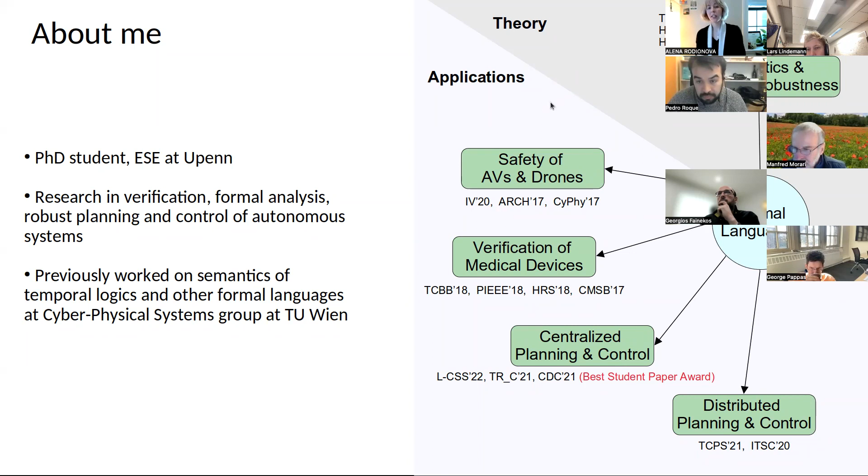That's why my PhD can be roughly split into two parts: one about mostly theoretical research on formal languages and temporal logics, and the second part about how to apply those findings from the theory to applications. That's why I split today's talk also into those two parts.

In the first part, we will cover some basic knowledge of temporal logics and robustness in general for them. I will present what has already been done and what my main contribution is. In the second part, we will touch upon those applications of different robustness measures for temporal logic, for planning and control of different cyber-physical systems.

Just so everyone understands, when I say applications, we use this term cyber-physical systems because those are systems in which a mechanism or an object is controlled by a computer-based algorithm. These cyber-physical systems cover a lot of applications such as safe autonomy, medical devices, drones, manufacturing, and many more. In today's talk I will be talking mostly about drones, but you should understand that these findings can be applied to any of those cyber-physical systems.

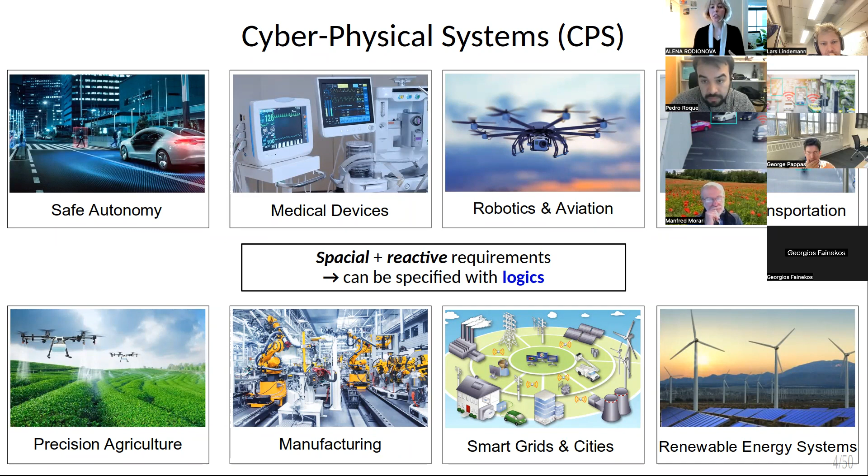If we want to do something good with those systems, for example control them, first we need to find a language in which we're able to specify what those systems are intended to do. Even though natural language is great, it's not precise or concise enough to express the missions of those systems. Moreover, those systems have spatial and reactive requirements. So the standard approach to express their missions is to use a formal language, or logic as one of those formal languages.

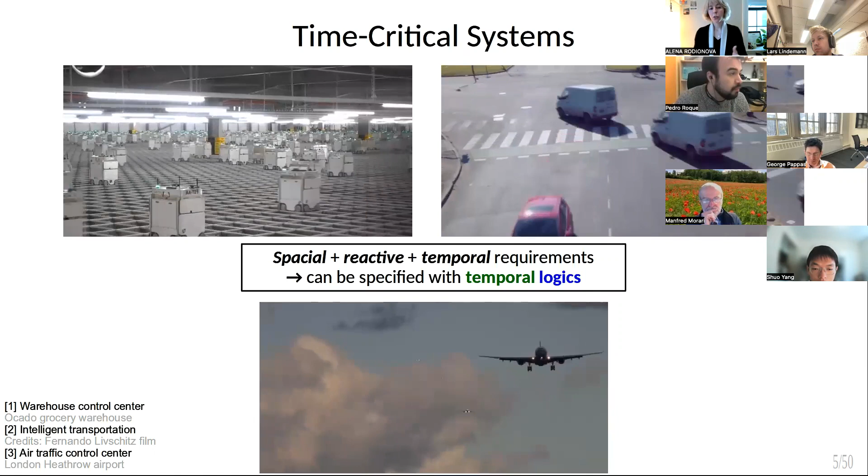One specific type of cyber-physical systems I wanted to mention is called time-critical. Those are systems in which the temporal aspect of the mission is the most important part. So on top of the spatial and reactive objectives, these systems also have a temporal aspect, and not meeting some real-time constraints might lead to catastrophic consequences. So instead of using just any logic, the standard approach for time-critical systems is to use temporal logic instead as the language to express those missions.

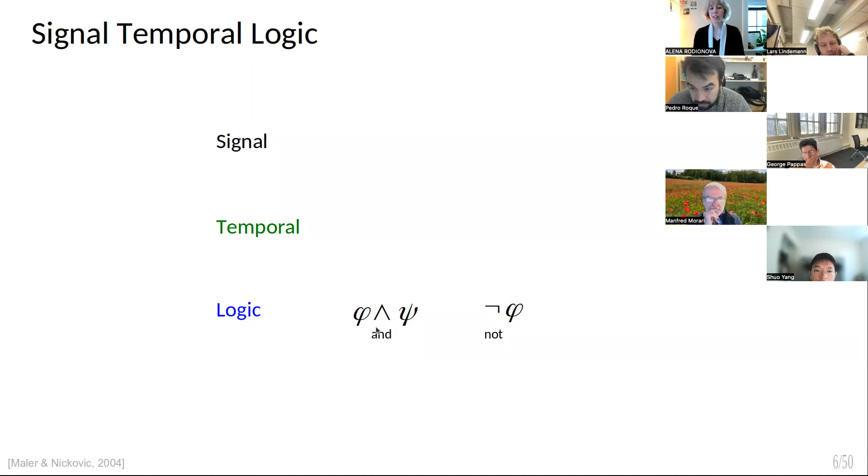One of those temporal logics is called signal temporal logic. It was invented in 2004 by Oded Maler and Dejan Nickovic, who was my co-advisor back in Austria. You could think of signal temporal logic as a simple extension of propositional or Boolean logic. We have operators like and, not, and or, the standard Boolean operators. On top of this, we have the ability to express temporal behaviors of the system, with additional temporal operators such as until, always, or eventually. Now we're able to express properties that say, for example, something must eventually happen in the future, or event A must be happening until event B happens, etc.

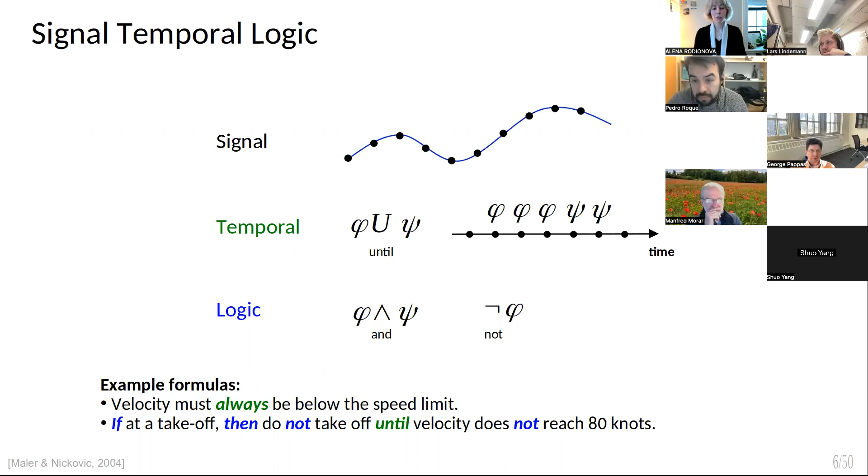The signal part here says that the satisfaction of the specification is evaluated over real-valued time series, which could be, for instance, the trajectory of a drone, the trajectory of a vehicle, or even multiple agents that participate in this mission.

So now, knowing the alphabet of this language, we also need to understand the meaning behind the formulas, and the meaning is called semantics. The first simplest semantics we could define is called Boolean semantics, which defines nothing but the satisfaction or violation of the specification. So Boolean semantics says if the formula is satisfied or if the formula is violated.

For instance, if we have the formula that says velocity must always be below the speed limit, you can see that for this specific trajectory, the specification is violated, and for both of those other trajectories, the specification is satisfied. The issue with Boolean semantics when we work with real valued signals is that we lose a lot of information about the signal that we could keep in mind. So for instance, those two trajectories satisfy the spec, and we don't know anything else.

On the other hand, we could obtain more information because we have those real values from the signal. That's what quantitative semantics does. The qualitative or Boolean semantics only defines a yes or no answer. Quantitative semantics gives you a real number about how well the spec is satisfied or violated.

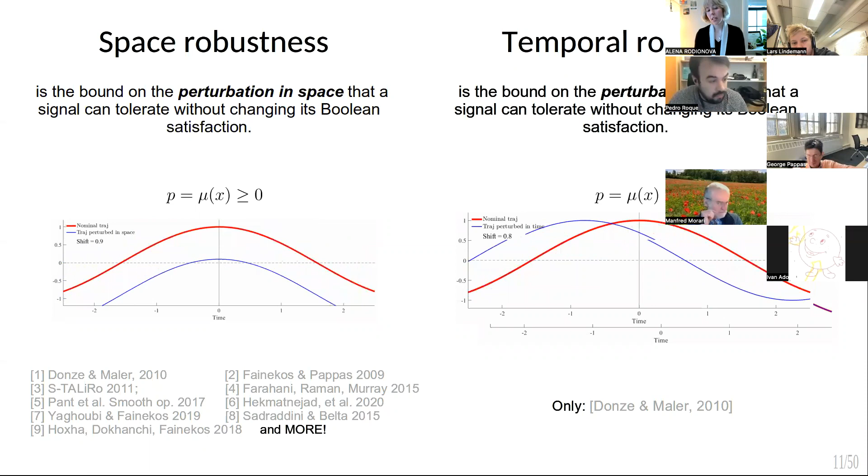Moreover, it has never been applied for planning and control in the past, and that's what our main contribution here is. My main contribution is that we provide this theory behind temporal robustness - the different definitions and the overall theoretical analysis of the meaning of different notions. In this first part of my talk, I'll try to briefly explain the meaning of different notions of temporal robustness, and we'll see how this can be applied for planning and control.

Let's take a look at the following example. We have some specific signal, and in order to evaluate satisfaction or violation of the spec for each time point, as we already saw, you first need to evaluate the predicates, each predicate within the formula for each time step, and then apply recursive rules depending on how many operators you have.

So you could think about them as predicate signals. And when we talk about temporal perturbations, you could think of them as shifting the signal to start execution of the trajectory earlier or start later - shifting trajectories to the left or to the right.

For simplicity of the presentation, since satisfaction depends on the predicates, let's think about it as shifting the predicates themselves in time. If the trajectory starts execution earlier, we shift predicates to the left. And if the execution starts later, we shift them to the right. Now the question is, how do those shifts influence the satisfaction of the spec?

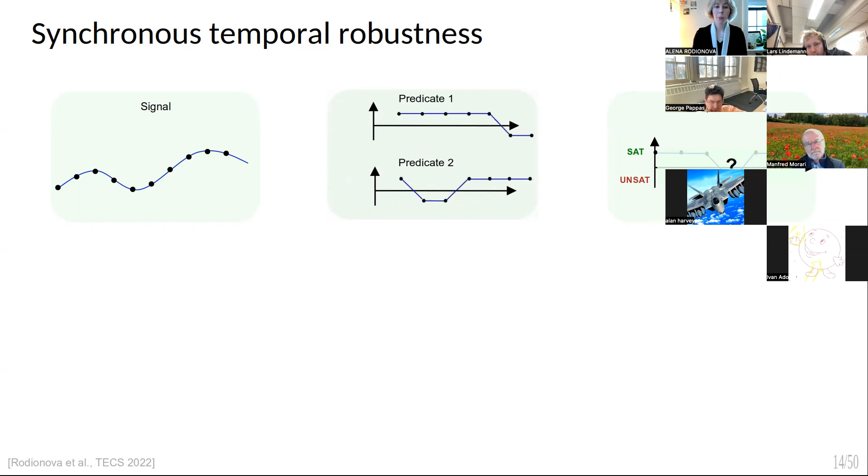The easiest way we could shift those predicates is together, synchronously in time, since that's the simplest case. Let's analyze that first. That's exactly what synchronous temporal robustness analyzes. It gives us this bound on the possible amount of synchronous perturbation in time that the system can tolerate.

Because those shifts can be to the left or to the right, we can also analyze left synchronous robustness or right synchronous robustness. Here I will briefly explain the left; the results can be extended also to the right.

The main result to understand the meaning behind synchronous robustness is as follows: if the left synchronous temporal robustness value is some epsilon, then we can shift predicates together, synchronously, in time to the left by up to epsilon. So all perturbation in a synchronous manner by up to epsilon will not change the satisfaction of the spec. Moreover, we can infer that anything greater than epsilon, which in discrete time would be epsilon plus 1, would lead to violation of the spec, to a change of satisfaction.

We specified it in English, and we can also specify it in formal formulas like here to avoid any ambiguity. This stands for: left temporal robustness for a specific trajectory and specific time point equals epsilon. Then we can infer that for all shifts h, the Boolean satisfaction of the shifted signal to the left is the same as satisfaction for the default signal. And for any shifts by epsilon plus 1, the satisfaction would change.

Okay, so that was the meaning of synchronous robustness. When we talk especially about multi-agent systems, if, for instance, all predicates are defined over individual agents, you could think about it as individual agents starting all earlier or starting all later. In those complicated multi-agent systems, sometimes it would be very beneficial to have the ability of saying how the system responds to perturbations when some agents start earlier or some agents start later.

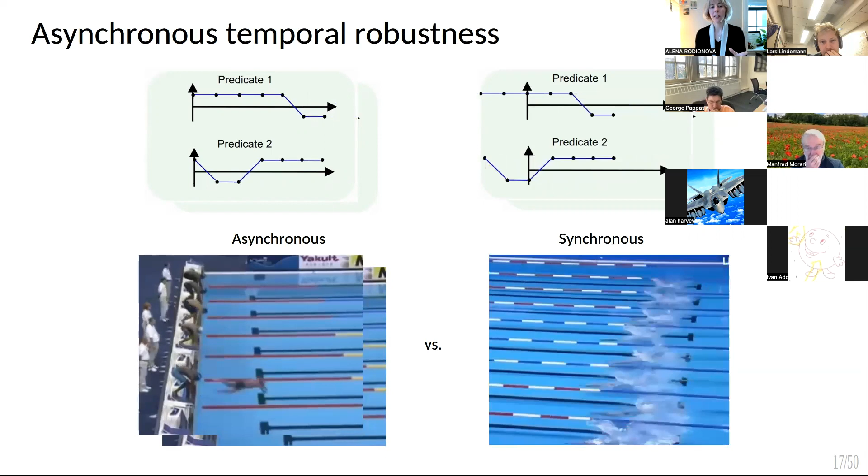That's the difference between synchronous robustness and asynchronous robustness. Asynchronous robustness is able to determine the behavior of the system when predicates are shifted by an individual amount in time. Let's take a look at how the property changes depending on synchronous or asynchronous behavior. I won't give you the precise definitions here since asynchronous temporal robustness is a bit more nuanced, and the property becomes weaker.

The only thing we can infer about asynchronous temporal robustness is that if its value is some specific epsilon, then we can shift predicates individually in time by up to epsilon. You should note two specific details here. First, we cannot say what would happen if the amount of perturbation exceeds epsilon, so we cannot infer the second line of the theorem that holds for synchronous robustness.

We also cannot infer the opposite direction of the statement. So for instance, if we have experimental data on the performance of the system, we cannot obtain the value of the robustness itself. Here you can see the statement again in formulas. The main difference, to recap, is that for asynchronous robustness we have individual shifts for every predicate within the formula—that's why we have H1, H2, etc., up to HL.

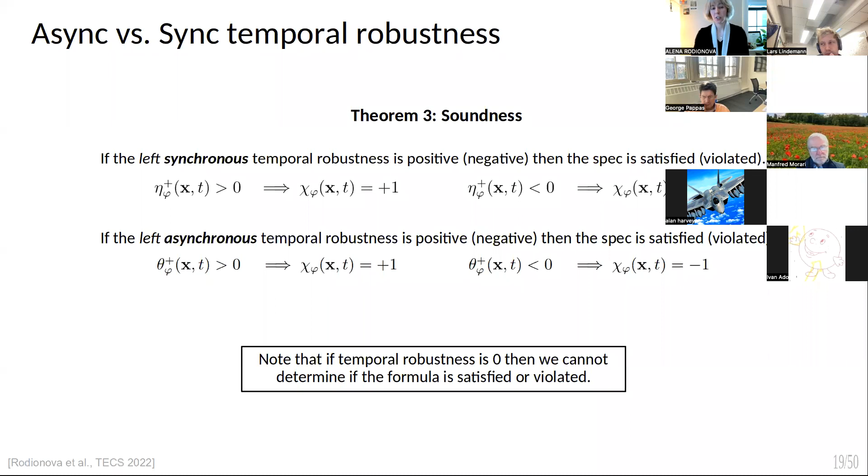Now we know that both of them satisfy the soundness property, but how do they relate to each other? From the meaning we already saw, it's pretty clear that asynchronous temporal robustness must be upper bounded by the synchronous temporal robustness, because when we think about it in terms of possible synchronous or asynchronous shifts, synchronous is just a specific type of asynchronous temporal robustness. So from this logic, one is upper bounded by the other.

If we saw the formulas, how they are defined, it's actually not that straightforward, and we had to prove those theorems first in order to reason about them. So that was the first result we showed, that one is upper bounded by another. Moreover, in a lot of simulations, we saw that usually the strict inequality holds.

We started wondering if there's ever a case where equality happens, because we couldn't find those executions in those scenarios. Later we were able to find specific fragments of signal temporal logic for which both notions, synchronous and asynchronous, are equivalent.

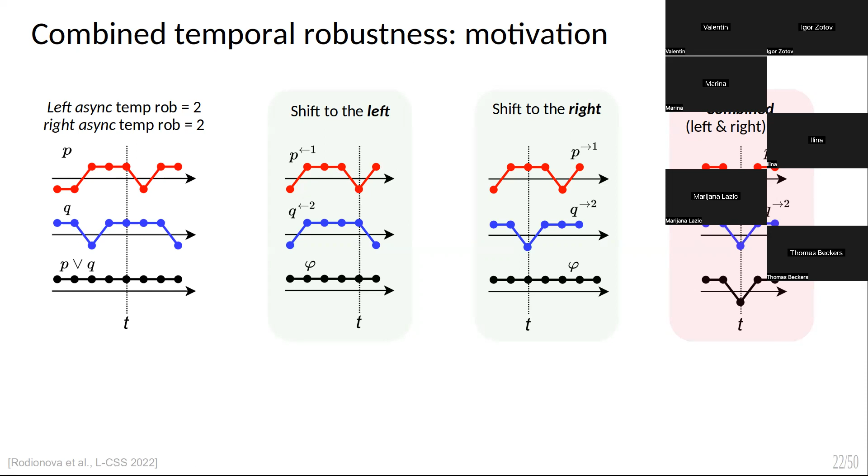So both of those notions were directional. Even though sometimes it's good to have information about both directions, there was no notion that combines both of them. Just to conclude this overall theoretical analysis, we also defined the combined left and right temporal robustness that combines left and right possible perturbations.

So now what we can say is that with this value of combined temporal robustness, we are able to provide information about perturbations in time into any direction—executions to the earlier time or executions to the later time.

And again, because it is defined through the left and right temporal robustness, it is pretty natural that the combined temporal robustness is upper bounded by that value, since it cannot exceed the value of the left or the right temporal robustness.

And for this combined notion, we also showed soundness, because again, it is this desired property that all robustness functions should have. That's why we also show that the soundness property holds.

So this concludes the first part of my talk, where I presented the comprehensive theoretical analysis of temporal robustness, what I believe is my main contribution. We analyzed left-right synchronous and asynchronous robustness, and also presented some results about combined left and right robustnesses. Recently we published a paper where we analyzed those notions for stochastic environments, and we kind of opened the door towards future research, because there are still a lot of open questions about what would happen with those notions when the system is stochastic and not deterministic.

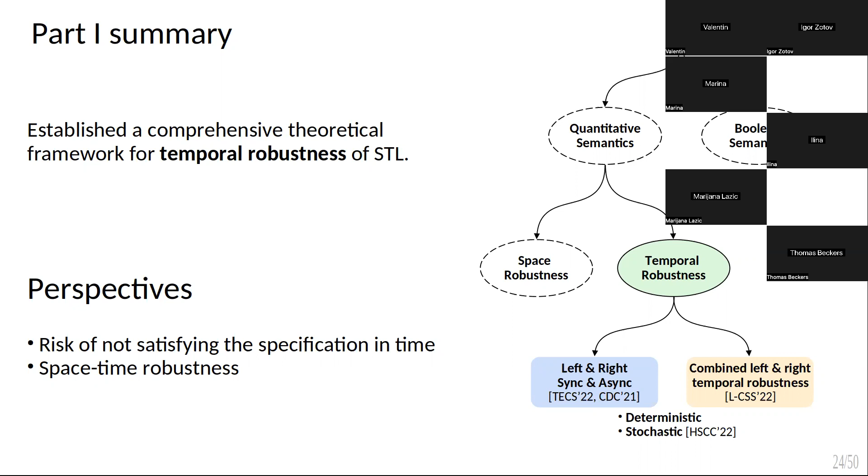Okay, so now we will shift to the applications and how to use the different notions of robustness functions for planning and control.

Let's now define the problem itself. Let's assume that we have some cyber-physical system—for instance, a drone—and we have defined its environment. And we have the specification in mind: a signal temporal logic formula that we want the system to satisfy. So what we want to do is find the trajectories for the drone, or for the overall system, such that not only dynamics—kinematic feasibility—hold, but also the trajectories satisfy the specification. This could be stated as an optimization problem where we try to find trajectories that minimize some cost function, the dynamics hold, input-state constraints hold, and the spec is satisfied.

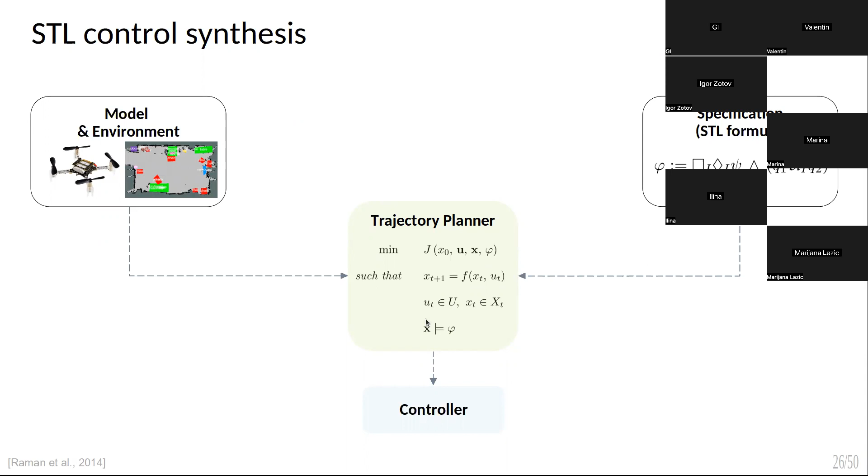After the trajectories are generated, we have the controller that allows us to execute those trajectories in real time. So instead of solving the previous problem where the trajectory just satisfies the specification, we could reformulate this as wanting to actually maximize the robustness function—we want to find the most robust trajectories. In this case, instead of minimizing the cost function, we would be maximizing a specifically chosen robustness function with respect to the same dynamic constraints. Also, in order for the system to satisfy the spec, we should require that this robustness function is positive, and due to the soundness property, we would be able to infer that the spec is indeed satisfied.

So that's what we are trying to solve here. This is called robust STL control synthesis. As for the robustness, we could, for instance, maximize the temporal robustness, or we could maximize the space robustness. Because I covered those two, that's how I'll split this part as well—first we will consider the problem of temporally robust control, and later we will cover some experiments of spatially robust control.

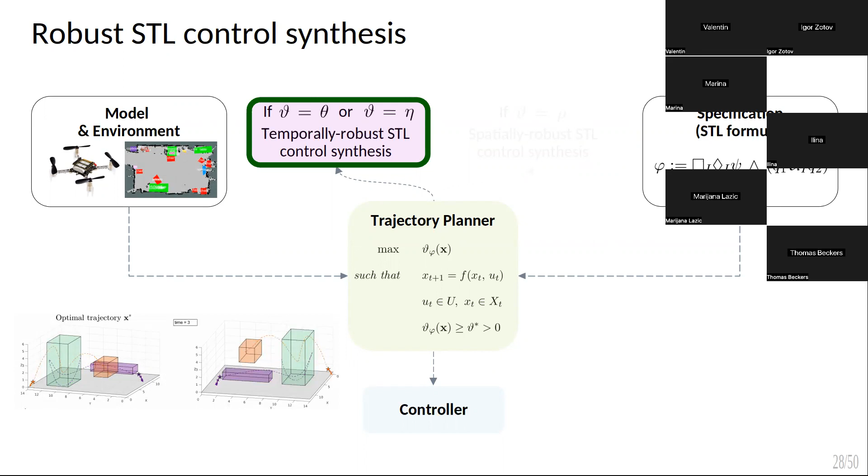So let's take a look at this temporally robust STL control synthesis problem. We're trying to maximize the temporal robustness—let it be, for instance, asynchronous temporal robustness—with respect to dynamics, input-state constraints, and satisfaction of the spec. This optimization problem is not easy to solve.

The first reason it is not easy is because the robustness function is not continuous and not smooth, since it uses min and max functions. So gradient-based solvers, or solvers that use derivatives, are out of the picture—they cannot be applied. Moreover, by definition, temporal robustness uses counting of steps, so even smooth approximations of min and max functions would not be applicable here.

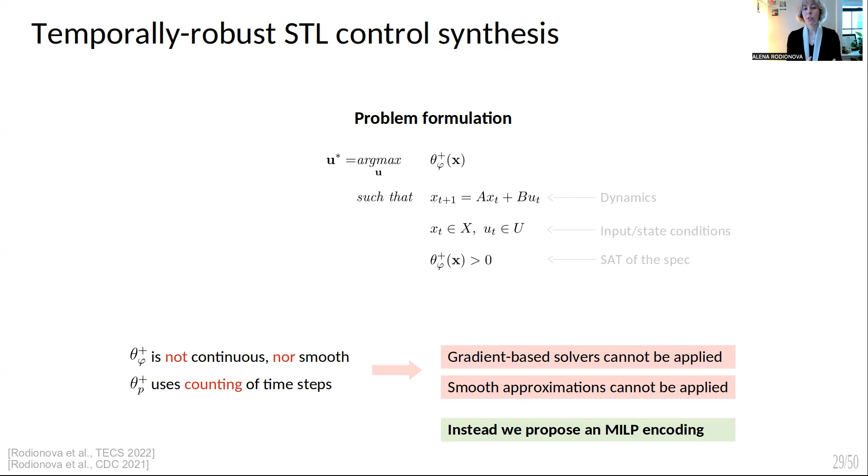So our solution consists of encoding the overall problem as a mixed integer linear program, and that was one of the big milestones we overcame when we worked on temporal robustness. I believe no one has ever used temporal robustness for control before, because nobody could implement it due to these issues with it being non-smooth and the inability to apply smooth approximations or gradient-based solvers. I won't have enough time to go into details about how we implemented it using the mixed integer linear program.

The only thing I wanted to mention here is, as I said, the temporal robustness uses counting of time steps. You could think about it as counting sequential satisfaction of the spec, like here, or counting violation of the spec, like in this case. So what we did is invent this idea of counters within our implementation that exactly count sequential steps of satisfaction or violation, and then adjust them based on satisfaction.

At least you can see that the values for the asynchronous temporal robustness will be the same as those counters. But that's all I'll cover here about the details, because I don't want you guys to get lost in technicalities.

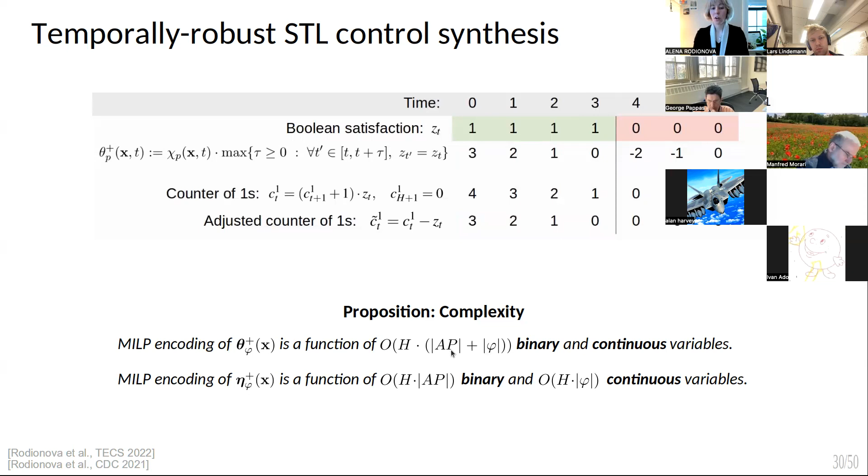Just one more comment about the implementation. Even though MILP problems are in general NP-hard, so obtaining the solution is not guaranteed, we could still analyze the complexity from the point of view of how many binary and continuous variables were introduced. We also showed that since asynchronous temporal robustness is more nuanced than the synchronous one, it uses more binary and continuous variables. But at least if the horizon is a constant, the number of binary and continuous variables scales linearly with the number of atomic propositions and the number of operators within the formula phi.

Now, having the ability to implement the overall optimization problem of maximizing the temporal robustness, we were able to perform different experiments and simulations where we maximize different notions of temporal robustness. For instance, here we maximized combined asynchronous, left asynchronous, and right asynchronous for a pretty simple, small specification where we have only one drone that needs to reach the goal set A within some specific time bounds and reach the goal B within some specific time bounds. Now we can compare their executions and obtain their optimal trajectories.

Also, just because we built the theory of what those temporal robustness notions mean, we can actually infer some information about the system based on the values we obtain. For instance, here, since we obtain the combined temporal robustness equal to 4, we can for sure say that the left and right temporal robustness must be at least 4, and that's exactly the case when we check those values. We also know how much of this temporal perturbation the system can tolerate before something bad happens to the execution.

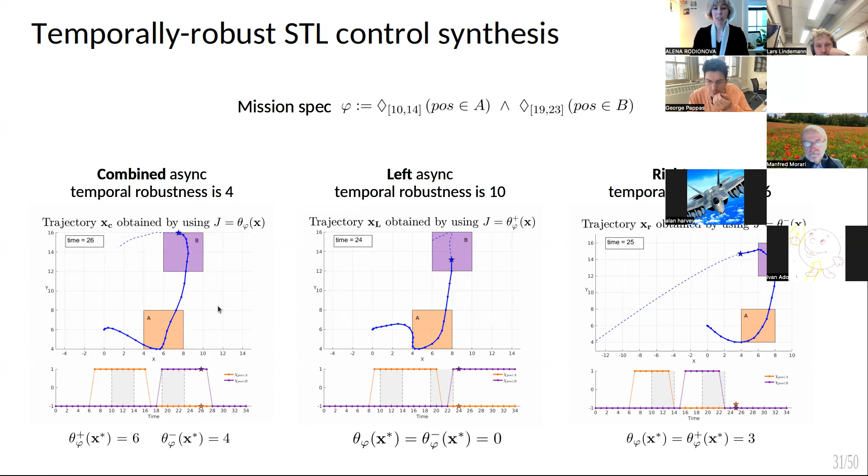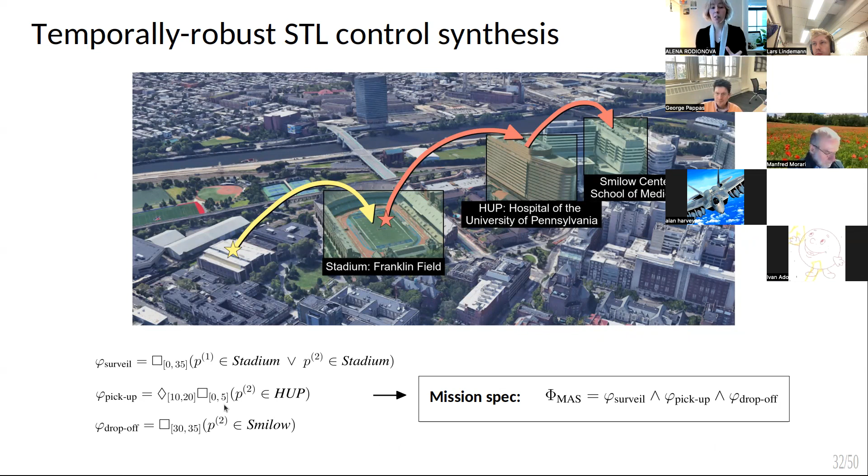Later we played with much more complicated scenarios where we had multiple drones, nested predicates, and nested formulas. Here we have two drones surveilling the area, picking up some objects, dropping off some objects, and it was a very big nested formula. At the end of the day, we were still able to obtain optimal solutions within seconds or minutes of trying to solve this problem.

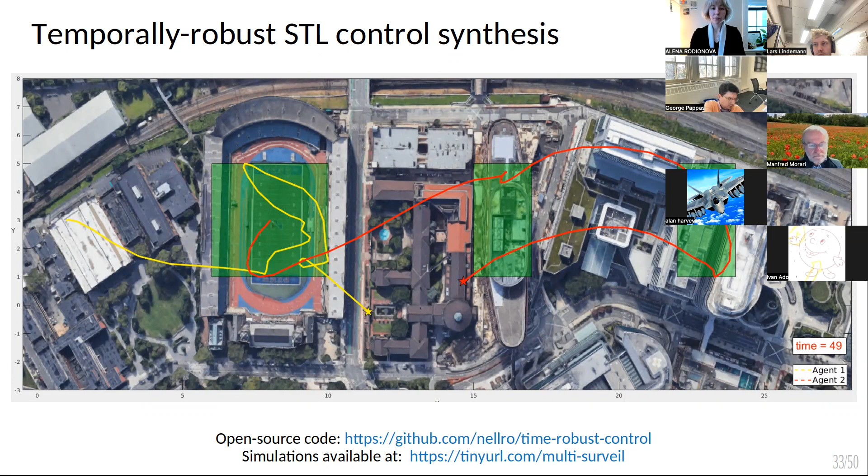We also released this whole implementation as an open source package. So that concludes the temporally robust control synthesis results.

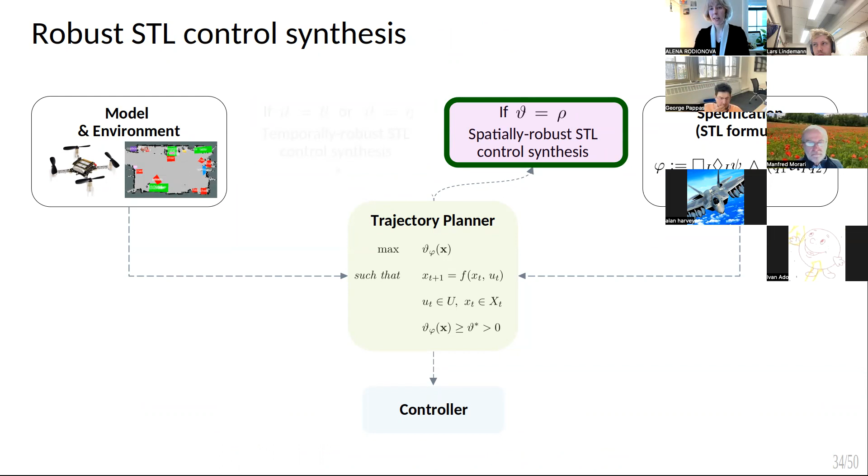Now, because in the beginning of my PhD, when I joined Penn, I actually joined working with Yash Pant, whose PhD was about spatially robust planning for drones, I participated in a lot of projects where we tried to solve the spatially robust STL problem. Here I wanted to cover also some results of this spatially robust control synthesis.

So just a small recap about space robustness. Because it uses min and max operators, the space robustness maximization is also not trivial, for the same reason of smoothness and non-convexity, which leads to the problem that gradient-based solvers cannot be applied. MILP solvers could be applied here, and they were actually applied by some Berkeley and Caltech people.

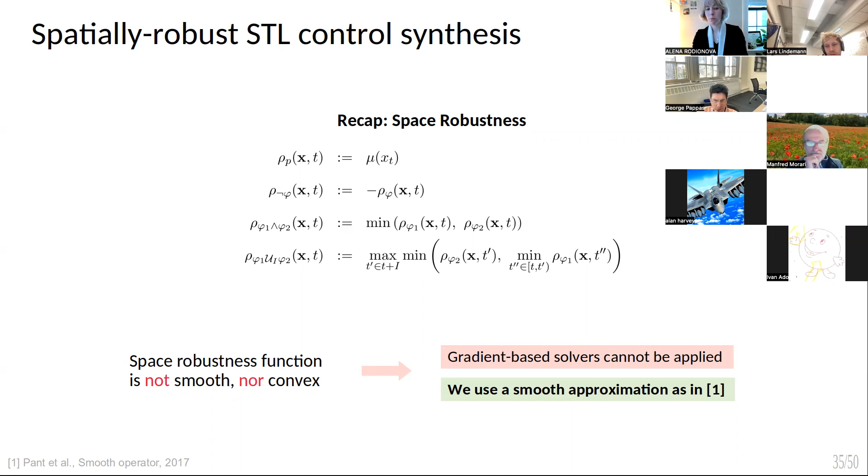But instead of that, what we did is use the smooth approximation of the min and max functions in order to maximize the robustness. So instead of the max operator itself, we used this approximated form that is differentiable because it uses only exponents and logarithms. Moreover, this approximation is upper bounded by a constant, so we always know how big the error is between the true value and the approximated value.

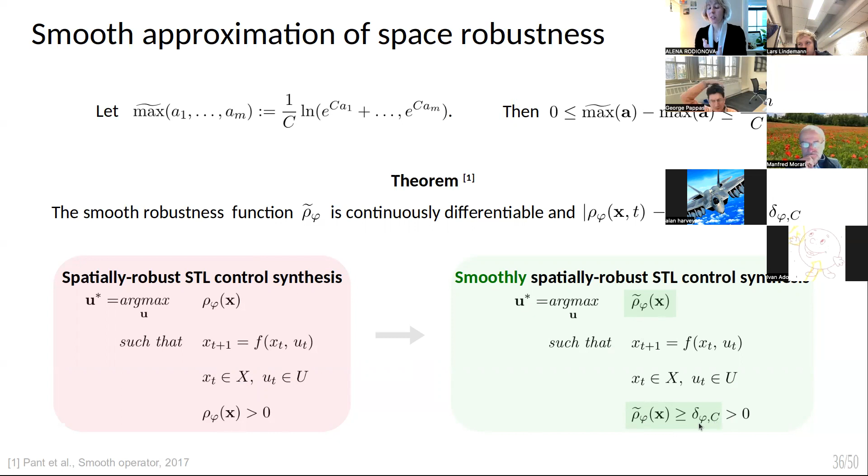Because of this property, we also know that the space robustness itself, the approximation of it, will also be upper bounded by a constant. That opens up an opportunity of not just maximizing the space robustness that we cannot solve, but maximizing the approximation, maximizing the smooth robustness instead. And instead of just requiring the space robustness to be strictly positive, we could require the approximated smooth robustness to be greater than this constant that we can obtain from the approximation.

Because now we can use gradient-based solvers, we were able to solve even bigger problems with space robustness, where we had multiple agents, big horizons of interest within minutes of execution, and very big nested formulas. We were still able to find feasible and optimal solutions within seconds or minutes of running the code, and we solved very complicated, pretty realistic experiments with drones at a big scale.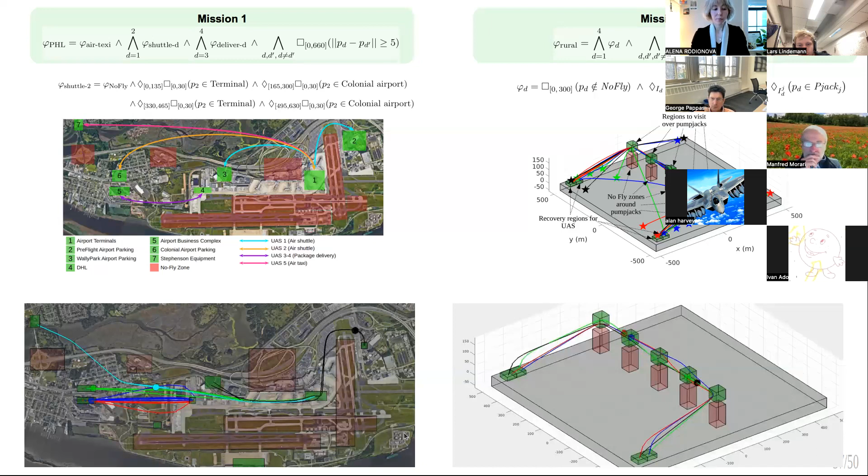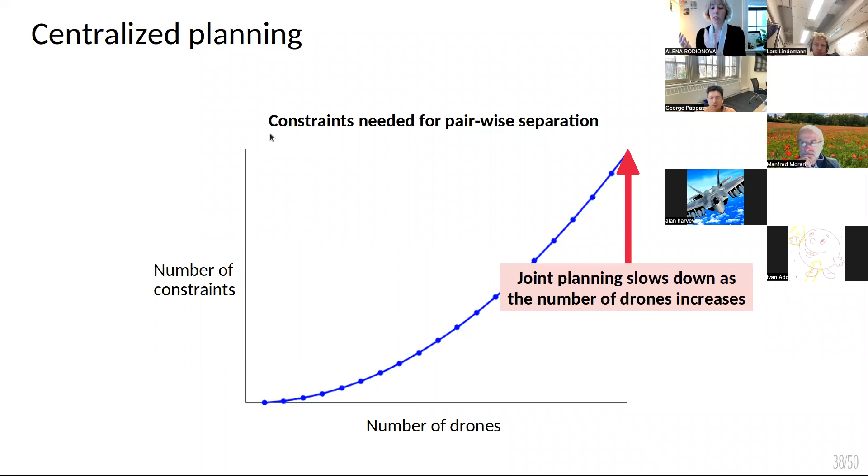The small thing I wanted to note here is this issue with centralized planning in general. With the number of agents increasing, we usually require non-collision separation—none of the drones should collide with each other. Every specification of the mission includes this pairwise collision avoidance constraint, and because of this, the number of constraints increases drastically as the number of drones increases. That really slows down the solvability of the overall problem.

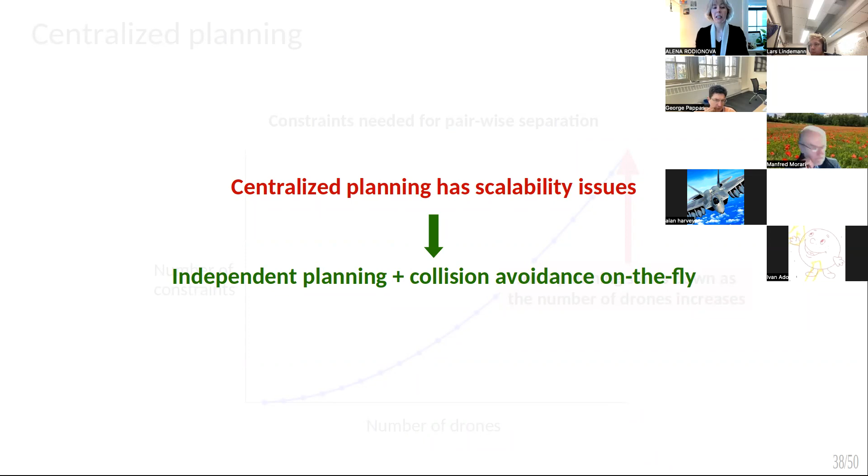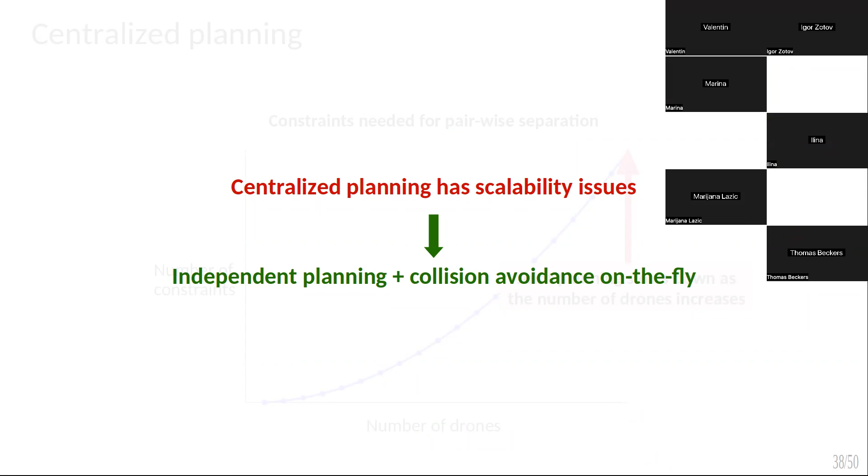So, on top of the results already presented, we also presented an improvement of that work, where instead of solving the overall problem in a centralized manner, we propose independent planning plus collision avoidance on the fly. We went from centralized planning to decentralized planning.

Here I just wanted to give you the high-level idea of how this can be done. Instead of solving everything for all agents together, we propose that if the mission allows us to decouple the specification into small sub-specifications for each agent separately, we plan for those specifications using the same optimization problem we saw before.

Then you might obtain trajectories that have collisions. Those trajectories are obtained much faster, but collisions might be possible. That's why you need the second step: collision avoidance. Instead of those colliding trajectories, we want to find updated trajectories that still satisfy the small sub-specifications, the individual submissions, but also achieve the minimum separation requirement between the drones—the distance between two drones should be greater than some threshold.

Instead of discretizing the space in general, we discretized the space of actions and used a learning-based collision avoidance algorithm. Imagine you have two colliding trajectories. For each time step of the trajectory, the first step of the process is to provide a discretized coarse action for each of the drones—for instance, fly above another drone, or fly to the left or right of another drone. It's a very coarse, finite number of discrete actions.

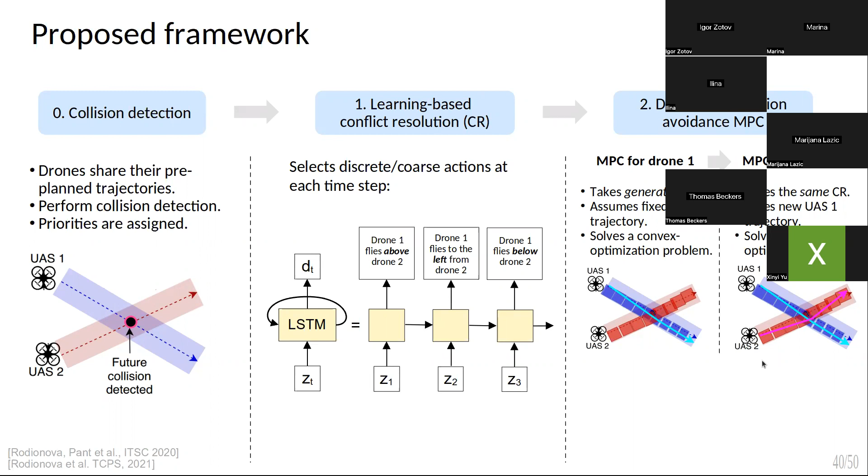Then, using those discrete actions that can be obtained by a learning-based algorithm, we run an MPC that provides smooth trajectories and continuous inputs to both trajectories. In this case, the collision can be avoided. Using this methodology that combines a learning-based, super-fast algorithm with MPC on the fly, we were able to run experiments on real drones where initially colliding trajectories were resolved.

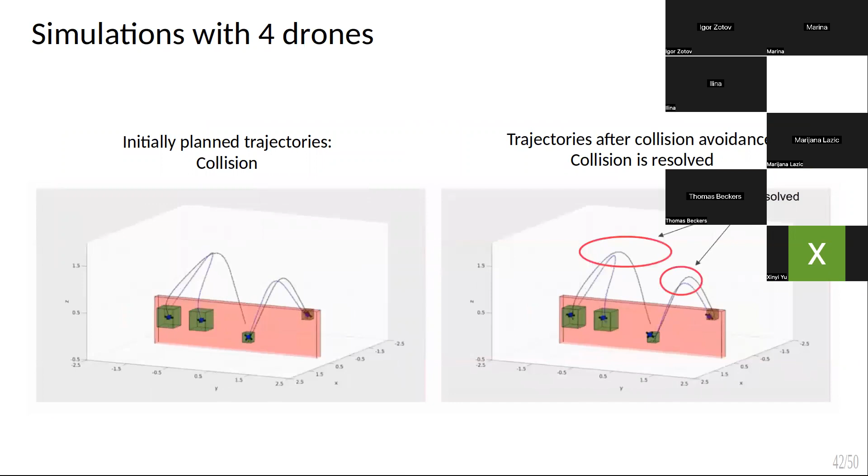After we broke too many drones, we decided to shift into simulations. In simulations, we showed more complicated scenarios of resolving collisions with obstacles and more sophisticated scenarios, and later we even generalized this property from 2 drones to as many drones as the system can tolerate.

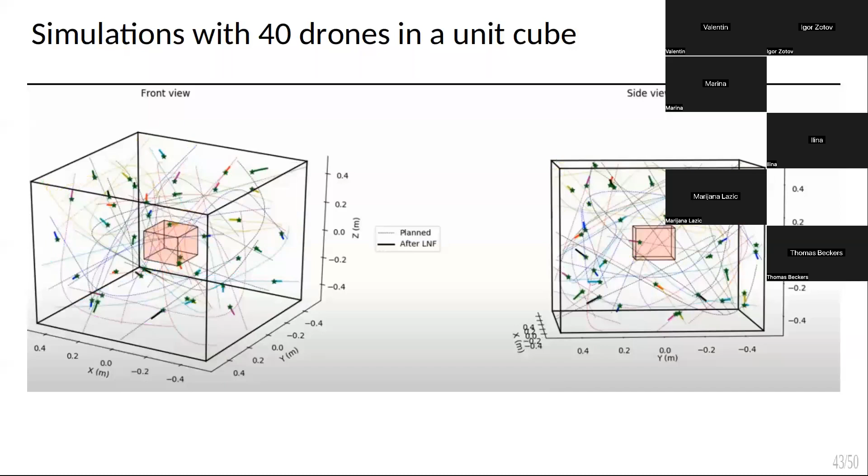Here, for instance, you can see the constrained unit cube. We started increasing the number of drones from 10 to 20 to 30, etc., and we reached 40 drones with an obstacle, managing to avoid collisions using this decentralized way of planning the trajectories for them. That concludes my second part of the talk, where we presented two subparts.

The first subpart was about using temporal robustness for planning and control, and also spatial robustness for planning and control. In space robustness, we considered two directions: centralized and distributed planning solutions. One possible extension of this work could be considering temporal robustness in the same decentralized way—this still hasn't been done.

Another possible interesting direction is, as I already mentioned, MILPs are in general very hard to solve—they are NP-hard. That's why implementing temporal robustness using something else rather than MILP would be very beneficial.

Another possible direction here would be to provide more guarantees about the behavior when we use those learning-based collision avoidance algorithms for spatial robustness, for instance.

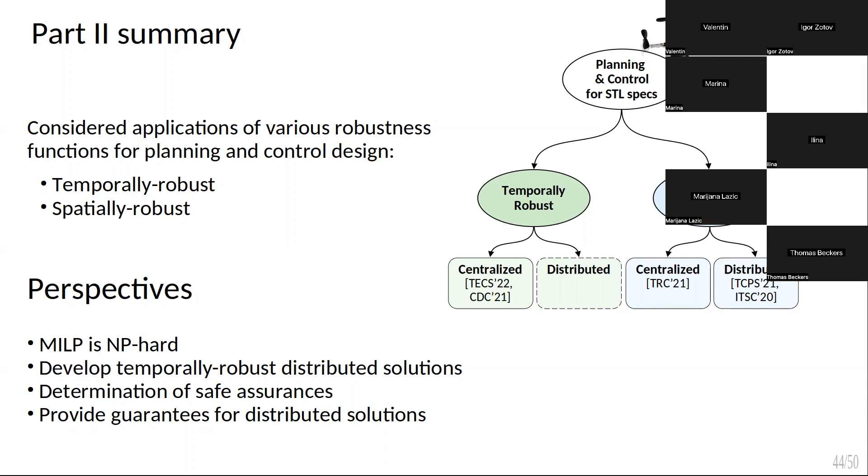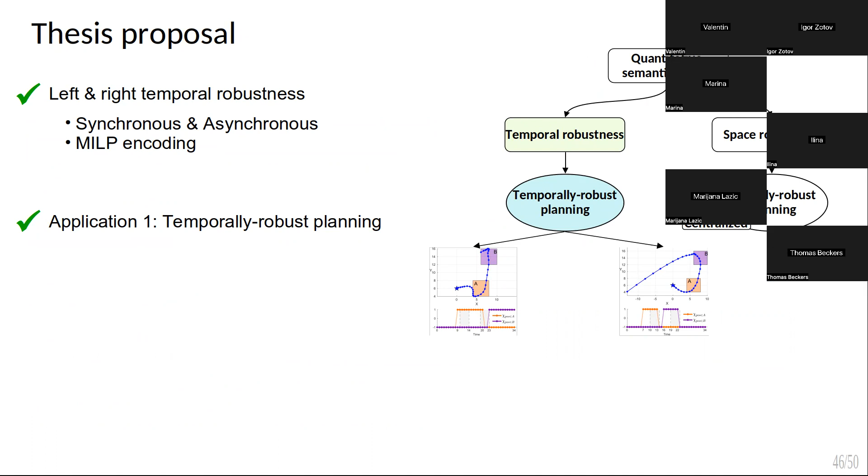To conclude this overall talk: in my thesis proposal, I presented only the left and right temporal robustness, and we also showed the MILP encoding that can be used for planning and control. As of today, for my final thesis presentation, I presented new results on combined temporal robustness, and also showed results of my work on spatially robust planning and distributed planning.

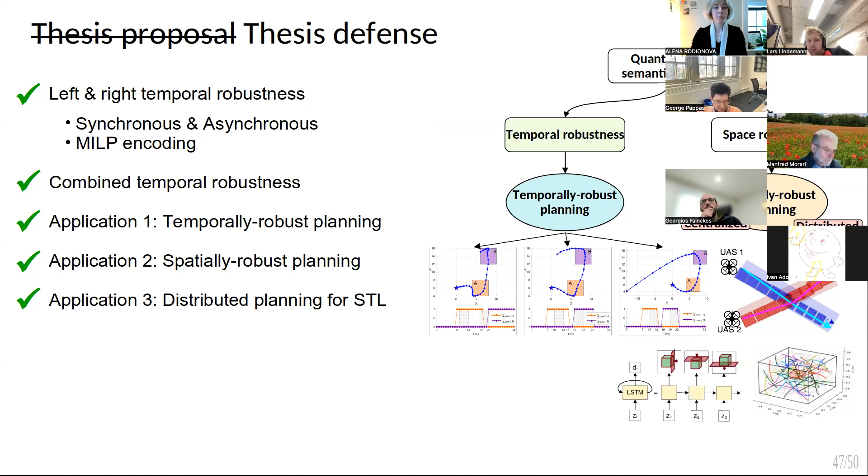At this point, I would like to acknowledge some of the people who made it all possible. First, thank you to my advisor, George, for supporting me, especially when I needed it the most, and for giving me the freedom to do research in the direction that I find interesting. I would like to thank Manfred and Georgios for being members of my committee and agreeing to serve on it, and to Manfred for agreeing to be the chair and for the support he provided.

I would also like to thank three of the best postdocs I had during my PhD: Hussam, Lars, and Yash. Without you guys, this all would not be possible.

I would also like to thank my collaborators from Intel, Maria and Ignacio, and also Rajiv from UPenn, for all the medical devices work that we have done in the past.

I would also like to mention all the places and internships I've done in the past. I started my PhD back in Austria, and I'm really grateful for this opportunity and the possibility to even be a PhD student that started from Austria. Later I was also an intern, and I had amazing internships at General Motors and Intel. I also participated in the Cybercardia project, which really gave me an opportunity to explore different directions and understand where my interests are. So thank you for that.